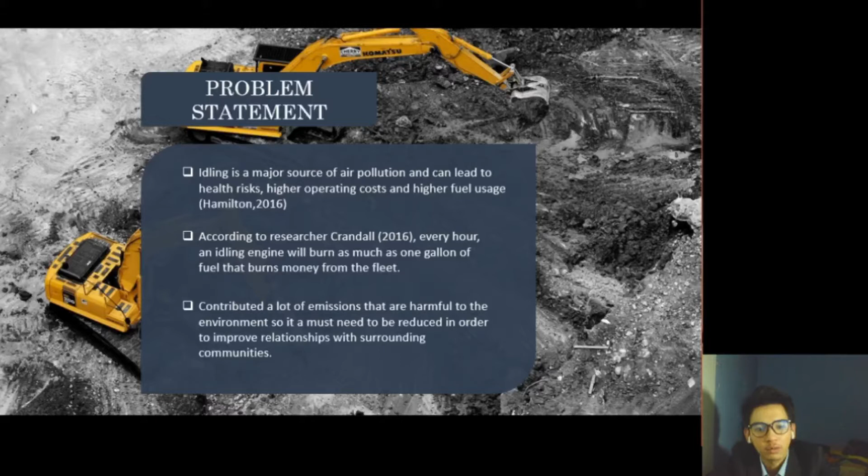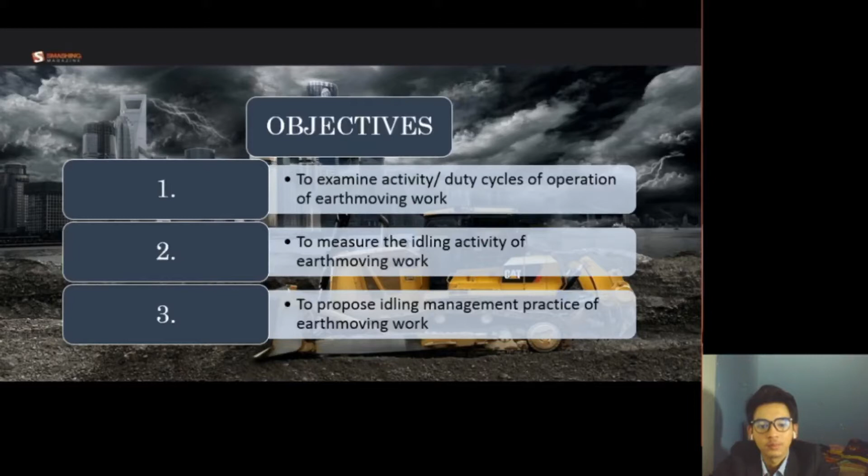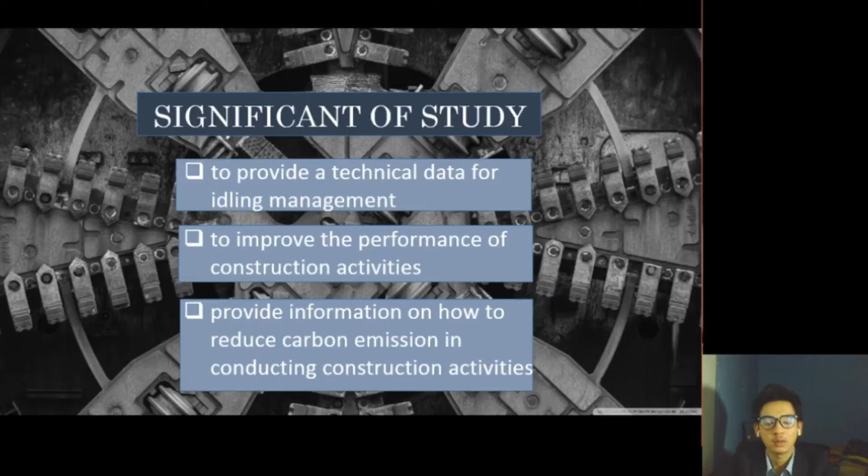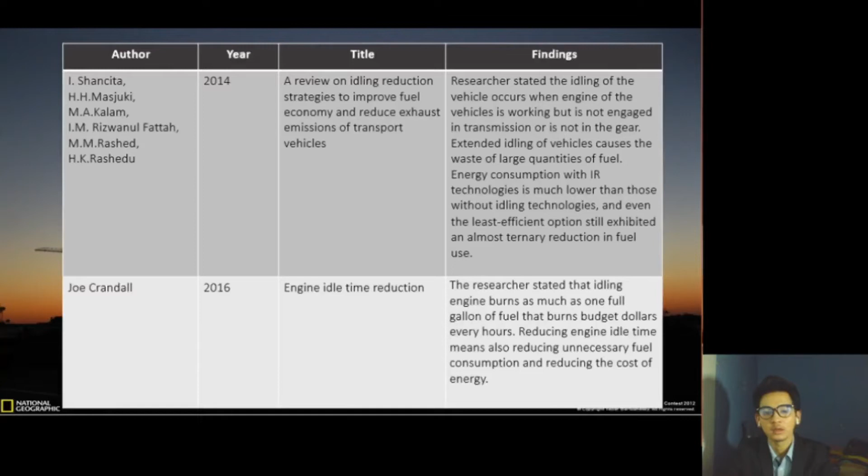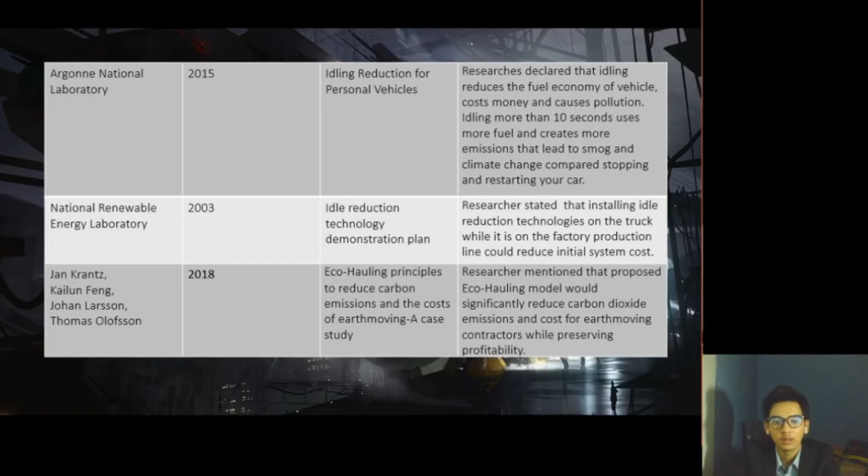Next, researcher from the journal titled Idle Reduction Technology Demonstration Plan states that installing idle reduction technologies on the truck while it is on the factory production line could reduce initial system costs. Researcher from the journal titled Eco-Hauling Principles to Reduce Carbon Emission and the Cost of Earthmoving, a case study, mentioned that the proposed eco-hauling model would significantly reduce carbon dioxide emission and cost for earth-moving contractors while preserving profitability.

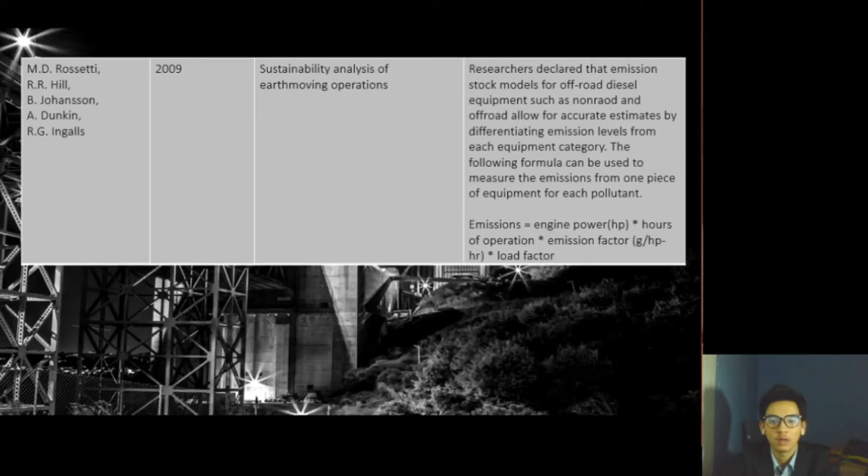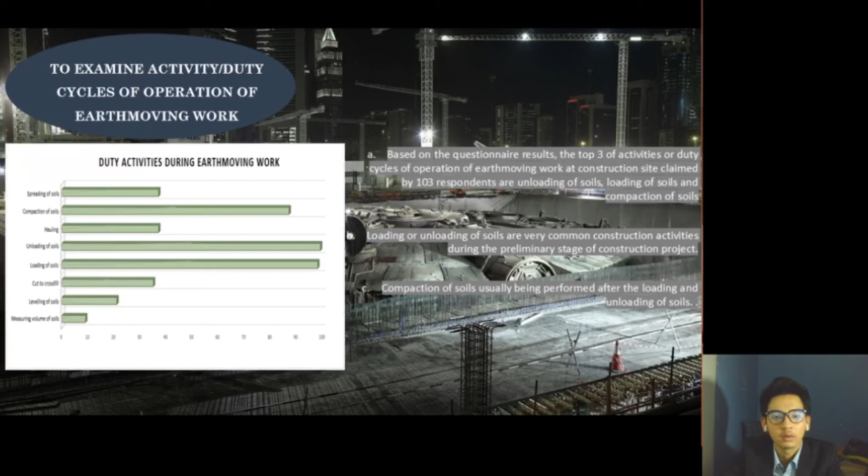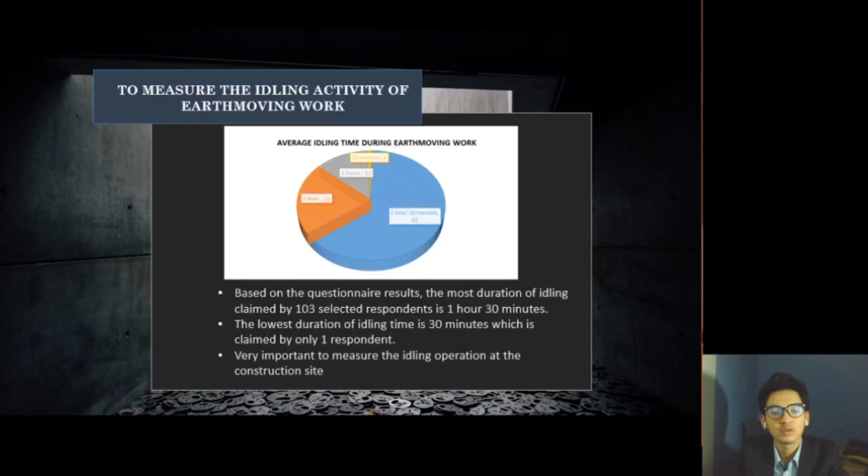Next, for second objective, which is to measure the idling activity of earthmoving work. Based on the questionnaire result, the most duration of idling claimed by 103 selected respondents is 1 hour and 30 minutes. The lowest duration of idling time is 30 minutes, which is claimed by 1 respondent only. It is very important to measure the idling operation at the construction site.

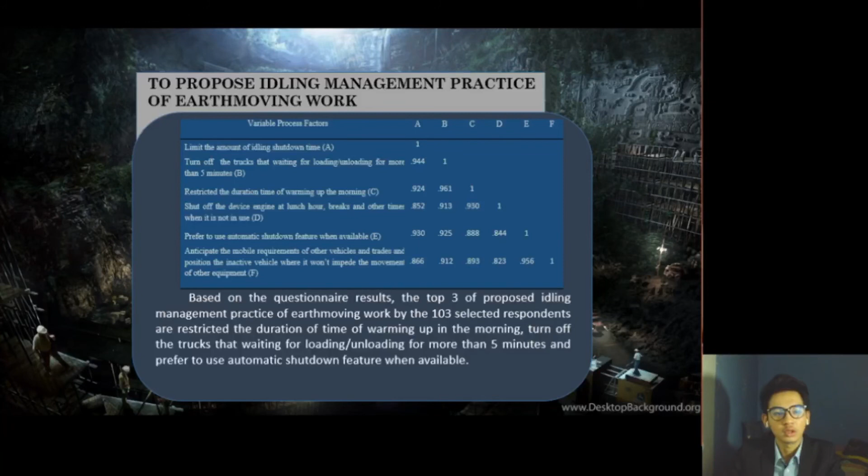Next, for third objective, which is to propose idling management practice of earth-moving work. Based on the questionnaire result, the top 3 proposed idling management practices of earth-moving work by the 103 selected respondents are restricting the duration of warming up in the morning, turning off trucks that are waiting for loading or unloading for more than 5 minutes, and preferring to use automatic shutdown feature when available.

As the conclusion, the objectives of the study have been achieved, which are to examine activity or duty cycles of operation of earth-moving work, to measure the idling activity of the earth-moving work, and to propose idling management practice of earth-moving work.

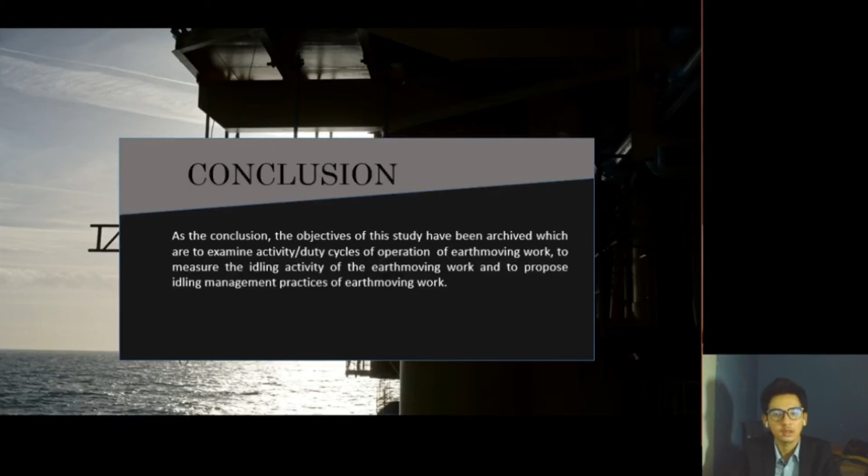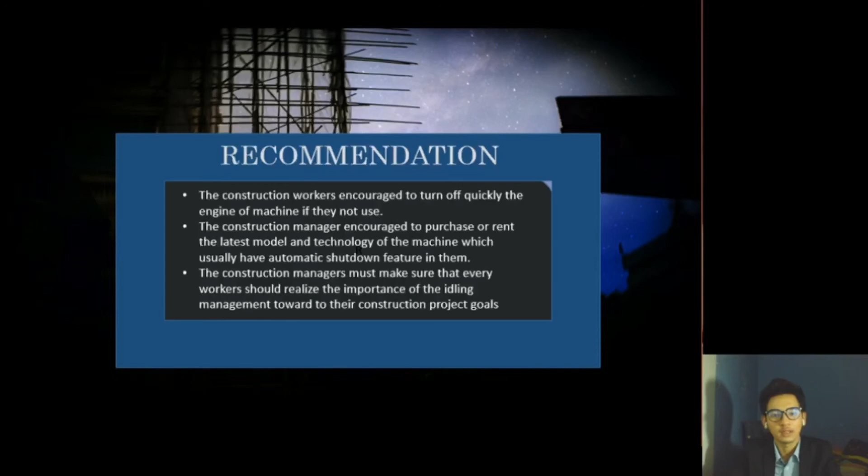For recommendation, construction workers are encouraged to quickly turn off the engine of machines if they are not used. Next, the construction manager is encouraged to purchase or rent the latest model and technology of the machine, which usually have automatic shutdown feature in them. And last but not least, the construction manager must make sure that every worker realizes the importance of idling management toward their construction project goals.